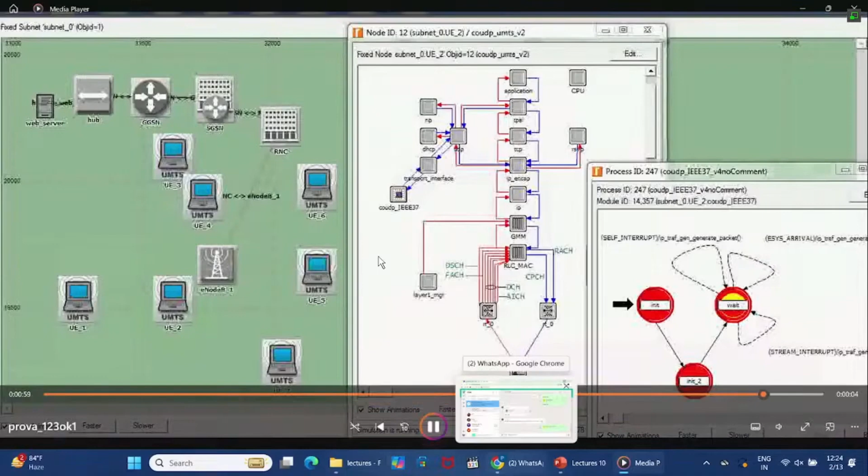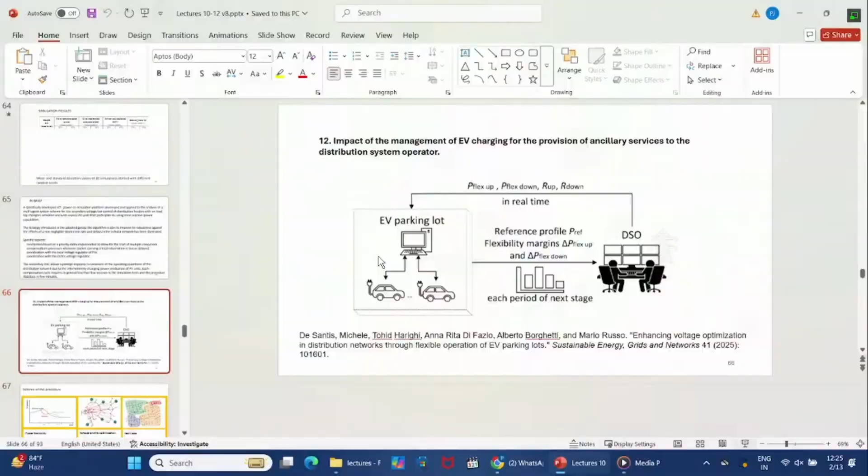It is still running. So, the last part of the lecture is focused on the parking lot and the use of them for the distribution system operator. So the idea is that the parking lot with many charging stations may be flexible in the consumption. So they have a profile of consumption, but if there is a parking lot of an airport or a train station or a commercial center, the people that are arriving probably connect, or we assume in the future we connect the electric vehicles to the charging station, then they go, and the car can stay there for a long time.

We have not considered several days. We have considered just that at the beginning and at the end of the day, the parking lot is empty. And the cars are parked and connected to the charging station for a while, for some hours and so on. So we have not considered very powerful charging stations, fast charging and so on, because the people are going there just to charge for a few hours, because they are doing other things in the commercial center and so on.

Good. So since the cars are connected, they have their battery, so it is not needed that they are charged very fast at the beginning; they can also charge a little bit less at the beginning and more at the end, or vice versa. So there is somehow a flexibility because there is a storage. So for this flexibility we assume a parking lot with several tens of these charging stations, so this flexibility can be offered to the distribution system operator.

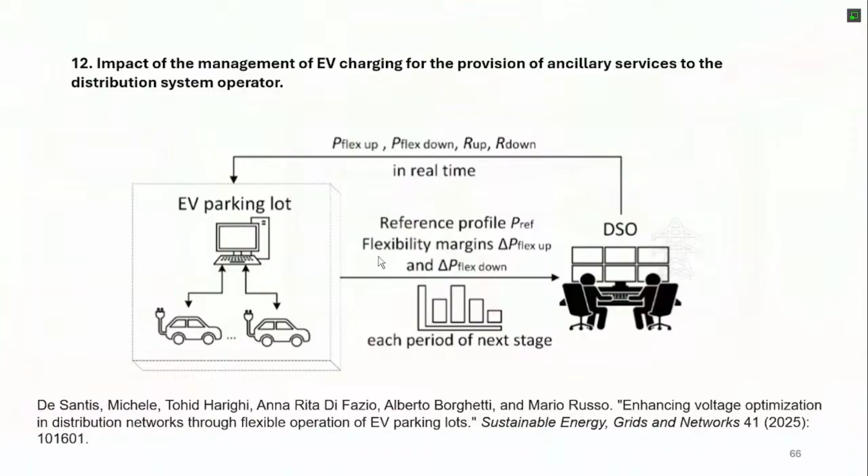And therefore the distribution system operator gives some orders to the parking lot to reduce or increase the power with respect to the reference value in agreement with the margins, the flexibility margins, and also we expect that the distribution system operator provides some money back to the parking lot, so remuneration, a financial reward for the provision of the reactive power service. Is it a scheme that is realistic in the future? It can be. It is this market of flexibility.

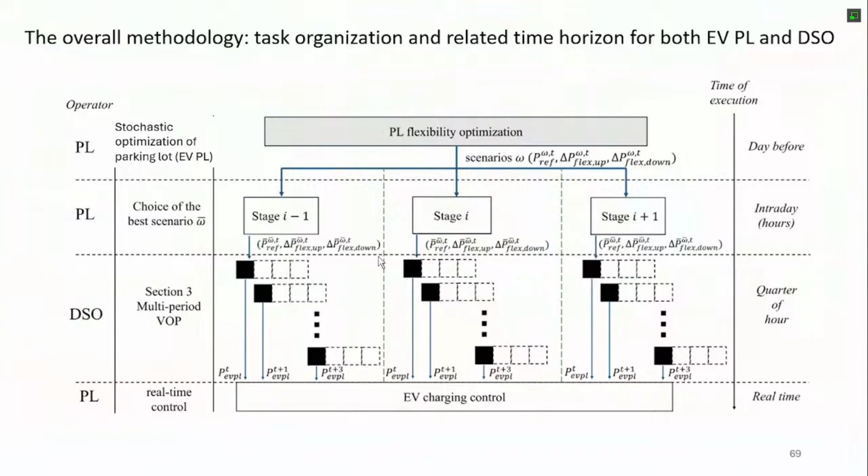And then there is the real-time control, which we have not implemented — that is, the parking lots decreasing or increasing power according to the decisions of the DSO optimization, in the implementation.

Multi-stage stochastic optimization is based on scenarios: from the forecast of the number of vehicles arriving, departing, or exiting the parking lot, we create several scenarios. In particular, we created 60 scenarios, but repeating the optimization for all 60 is too computationally expensive. So to reduce the computational burden, similar scenarios are grouped.

This grouping is done using a procedure called K-medoid. What's the difference between K-means and K-medoid? K-means takes the mean between the scenarios that are grouped. K-medoid takes one of the original scenarios — the one with the lowest Euclidean distance to the others — so the most representative scenario in the group.

Why do we do this? Because the number of cars parked needs to be an integer, it cannot be 1.5 cars. If you take an average, you get a non-integer, unrealistic result. Moreover, the number of cars in the parking lot cannot be negative — you can't have more cars exiting than entering. So to respect these feasibility considerations, we take one of the initial scenarios as created, preserving all these constraints. They are not altered by the K-medoid aggregation procedure.

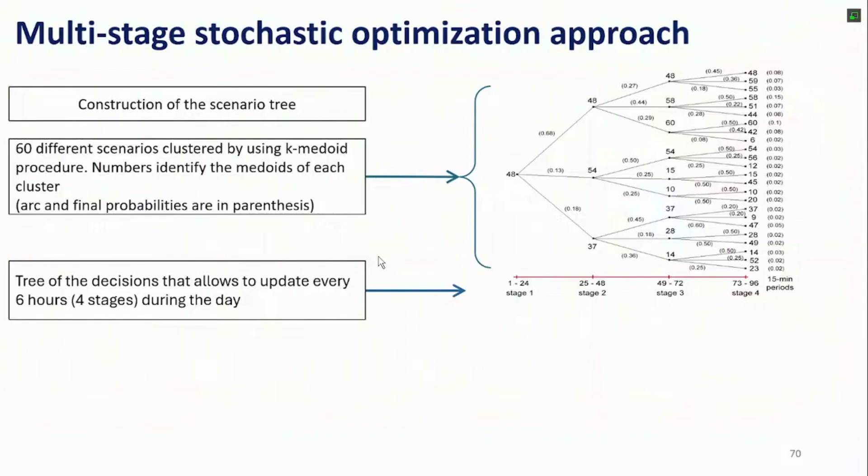Obviously, these are the representative scenarios that are also associated with a probability, according to the number of scenarios that are grouped by this centroid or medoid in this framework. So the optimization is for the calculation of the reference profile and also for the calculation of the up and down flexibility margins for each duration of the flexibility.

Because the flexibility we have considered can be 15 minutes, so we have, for example, a reduction of power for 15 minutes, but we can also think about 30 minutes, and obviously the flexibility will be different. Probably the reduction of power will be lower. And we have also considered 45 minutes. So these are the three intervals in which we can have flexibility, and we need to calculate distinct flexibility margins for each of them.

So this is done by repeated optimization for each time. But it is the first one that is stochastic. The second one is deterministic, because we are already in that stage.

So this is the objective function of the stochastic formulation. You see this pi is the probability of the scenario. The scenario is indicated here as omega. So omega is the scenario, pi omega is the probability for each scenario. We need to sum up the results for all the scenarios, and this is the objective function for each scenario.

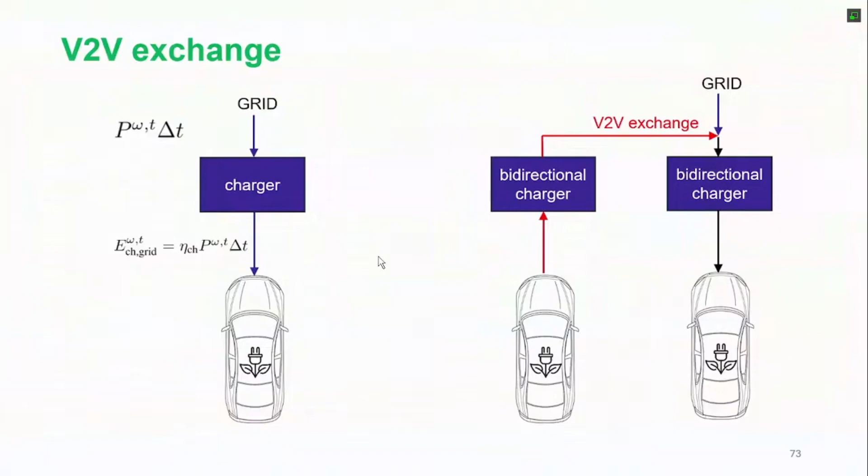But in this way you can compensate for this. Is it reasonable? This was the scenario that we had in mind. So it is more vehicle to vehicle rather than vehicle to grid.

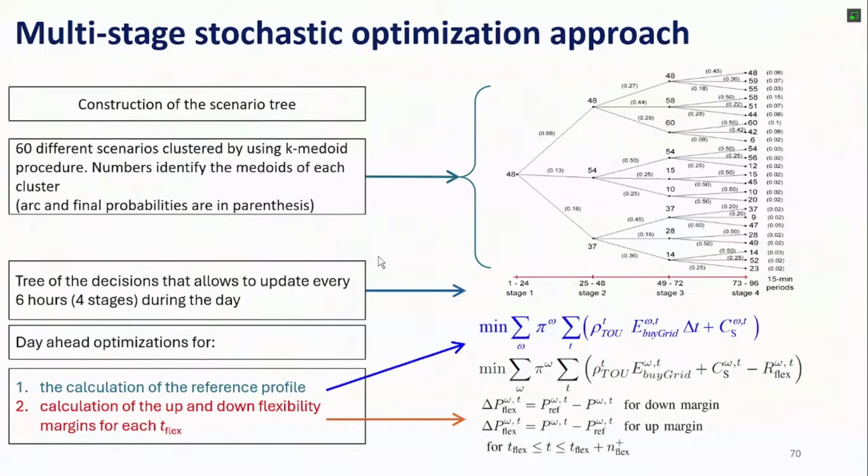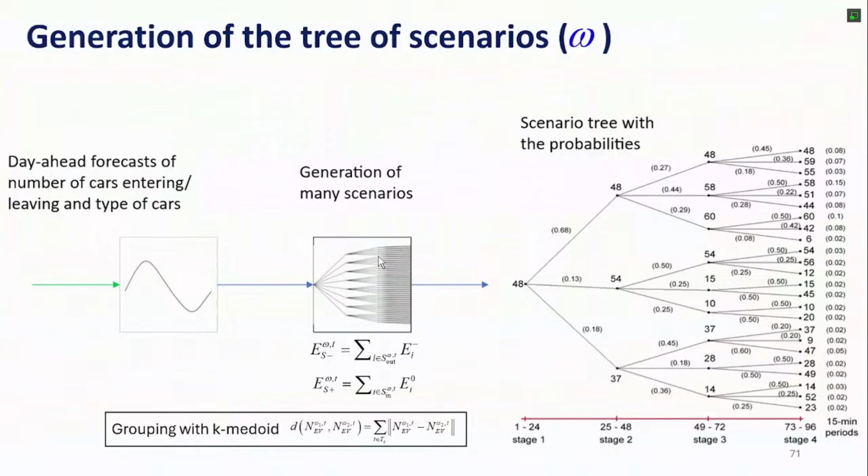Here I have also indicated the calculation for the flexibility margins, in which there is this reward given by the DSO to the parking lot because it provides some margin - down margin, so you reduce the power with respect to the reference power, or up margin, so you can increase the power with respect to the reference. We have also taken into account the recovery, so this is the idea. And this is the generation of the scenarios with a forecast, many scenarios, and the grouping that we have already described before. And then this is the objective function that we have already described.

Now it is this one, and then this is the idea behind this vehicle to vehicle. This is the equation - there are the constraints, so the balance, the level of energy stored in all the cars. We have not considered the cars one by one, because otherwise the number of variables explodes with many cars, so we have grouped them together. So this is the total level - it's like a battery with a dimension that is shrunk when there are few cars, and enlarged when there are many cars. So it is something like this.

And the inputs in this battery are not only the energy coming from the grid, but also the energy that is there at time zero, when they connect already in the battery. So we have considered the net, and here are the losses in the vehicle-to-vehicle exchanges, and this is the use of the initial charge. And obviously, the energy not only enters this battery, but also leaves - when a car leaves, it takes out also the energy of its battery. So this is considered here, it is minus this energy when the car is leaving.

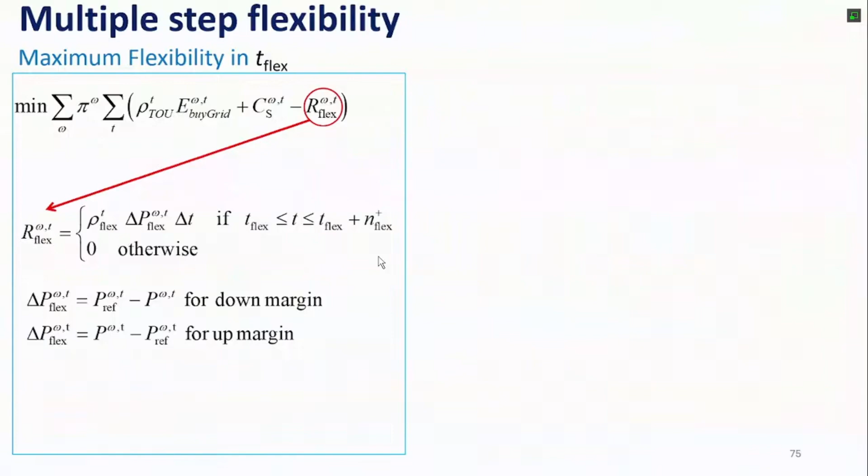With all these equations, this is the multiple step flexibility calculation. So there are these rewards that I already mentioned. These are the revenues for providing up and down margins, and this is the idea that when you have, for example, a flexibility down, you need to recover after.

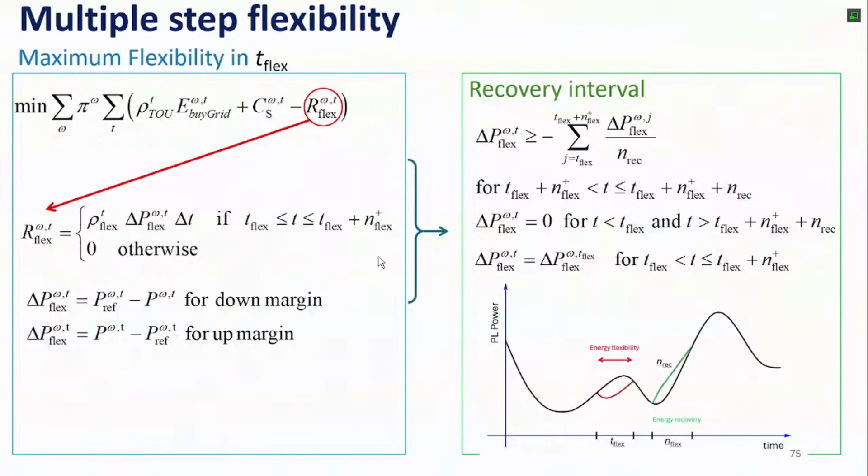So there is a period that we have fixed at 45 minutes after the provision of the flexibility, in which you are allowed to recover, for example increase the power, in order to recover the charging service. So it is not a battery. It is something that has many limitations with respect to a battery if we want the cars to be fully charged. Otherwise, there is a decrease in the quality of service of the charge. Do you have any questions so far?

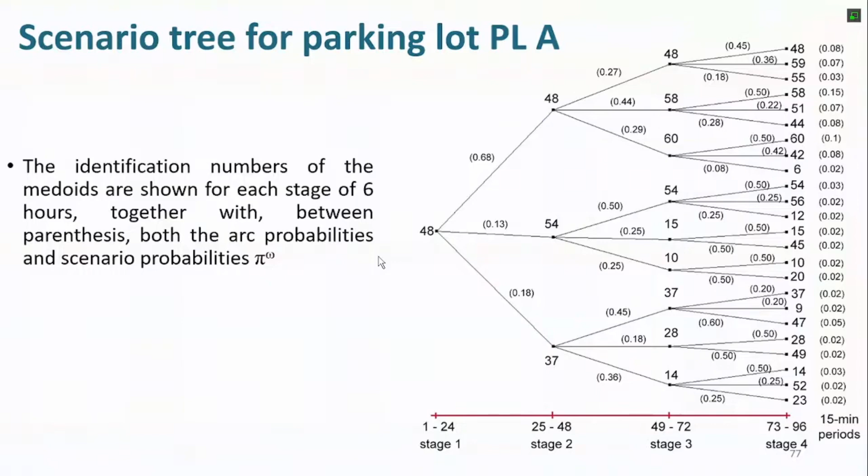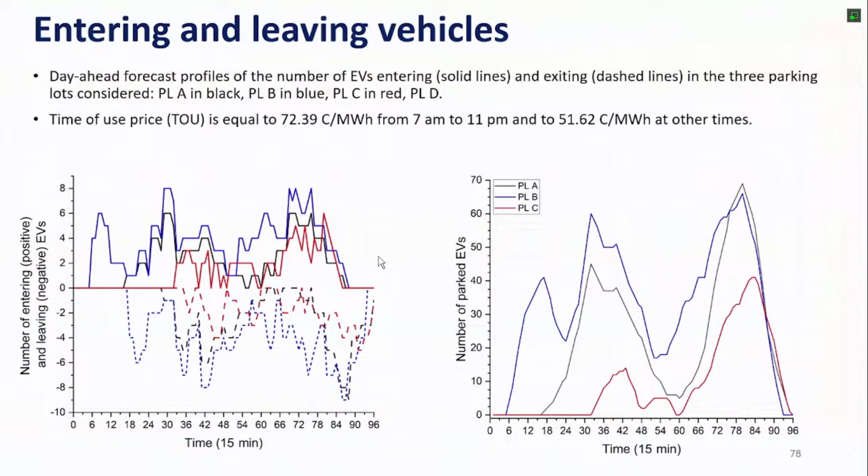So these are the scenarios, I mean the profiles for the parking lots, the forecasts of the number of cars that enter and leave in all the periods, and this is the number of parked electric vehicles, which is combined. This is obtained from this for the different parking lots, A, B, and C. The last one is D. So you see different profiles.

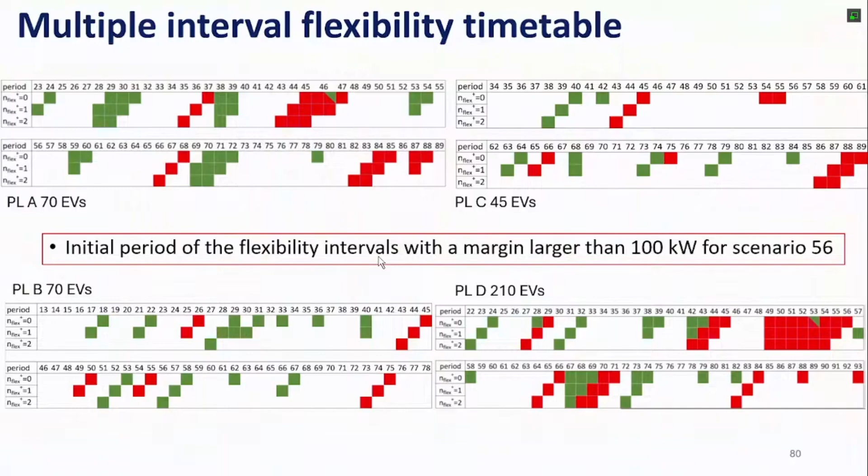This data, with also the indication of how much flexibility, is given to the distribution system operator, so the distribution system operator can carry out the voltage optimization. So this is the problem for the voltage optimization in the distribution network at the beginning of each stage. So every 6 hours the parking lot is expected to provide this flexibility. The parking lot does not provide the flexibility the day ahead for the entire day, but just for every 6 hours.

This appears to be more reasonable because giving all this data the day before was risky, because they don't know. It cannot give the indication every 15 minutes because it is difficult for the distribution system operator to do all this work, so we thought every 6 hours the parking lot gives this flexibility margin to the distribution system operator. The distribution system operator calculates how to use it and whether to use it.

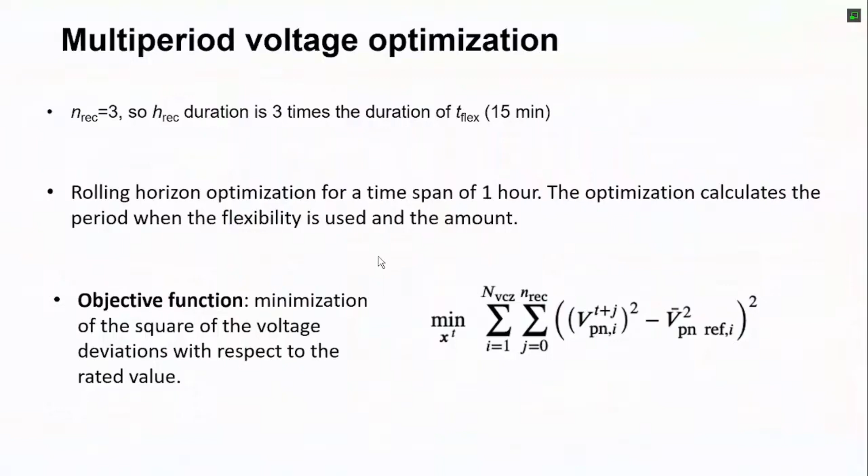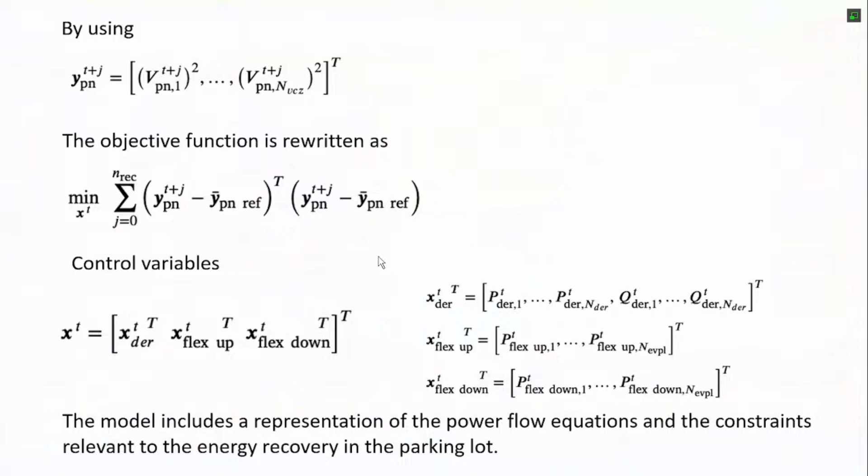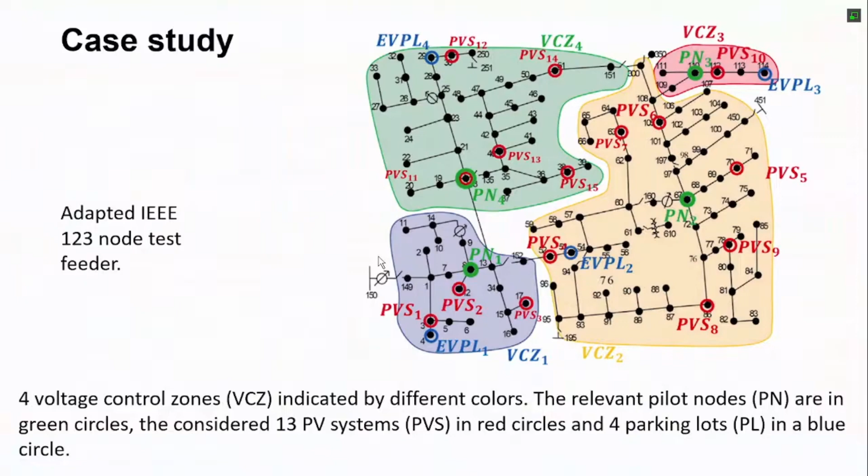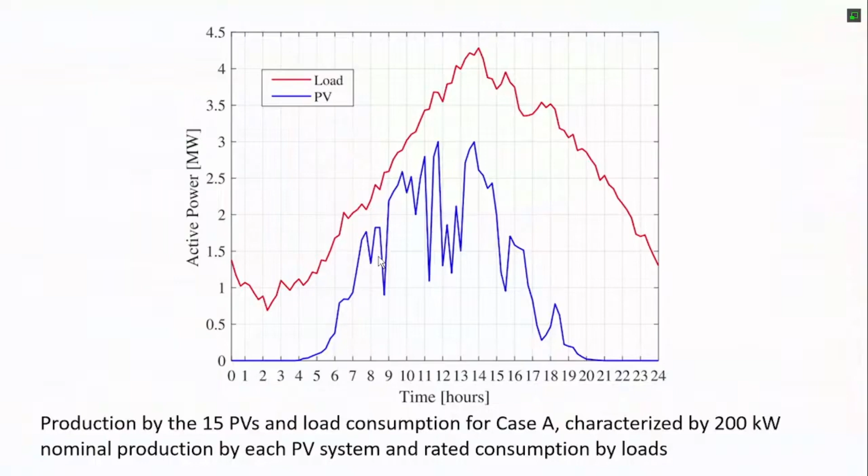And these are just the data for the simulation. So this is the load, photovoltaic during the day, and it is assumed here deterministic. We have just the stochastic for the parking lot, and then this is the time evolution of the objective function of the voltage optimization.

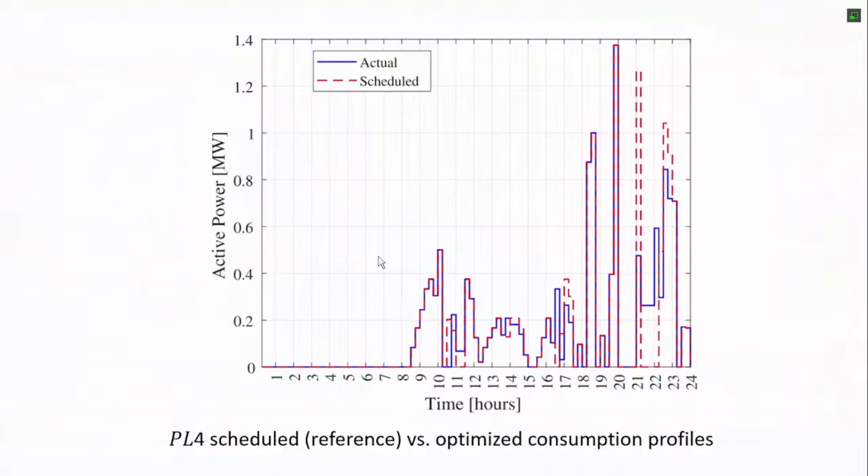At the end, we have also compared this with the voltage deviation index calculated for 24 hours, the sum of the objective function values, through power flow calculation every 15 minutes. So we have considered 2 cases. The one that I already showed, case A, in which the rated power of each photovoltaic system is 200 kilowatt, and the other with 300 kilowatt. It is not the only difference, because in case B also the load is decreased to 30% of the initial. So case B has much more photovoltaic than load. So the photovoltaic is increased and the load is decreased.

So in brief, the method characterizes and uses the flexibility provided by parking lots equipped with electric vehicle charging stations for the optimization of the voltage profile in the distribution network, assuming a predefined reward per kilowatt of up and down flexibility service. The electric vehicle charging station calculates both the reference demand profile and the flexibility margins in advance, as I said, at the beginning of each stage, every 6 hours. And for this purpose, a multi-stage stochastic procedure is implemented, allowing recovery after the period when the flexibility is requested.